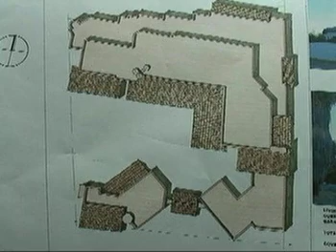As you can see from this particular roof plan, there's the main residence, a garage, and then a detached guest house attached by a breezeway. During staff's review, this residence does comply with all zoning codes and regulations. The pad elevation of the house is about 466 feet.

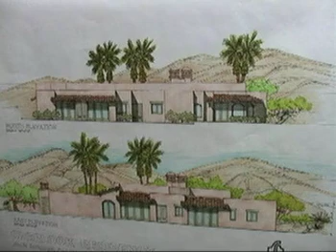Neighboring pad elevations—you saw a case at the previous commission meeting for the house behind it. That house has a pad elevation of about 474, so it's about 8 feet lower than the property to the north. In terms of building height, you can see from the west elevation, staff chose to take building height from essentially finished grade because of the way the lot slopes up, instead of from top of curb or average curb.

At this particular level, the house is about 11.5 feet. At the second level, it's 15.5 feet. And at the top part, it's about 14.5 feet from finished grade.

An AMM was approved for a 5-foot reduction in the front setback. The engineering department had required an additional 5-foot dedication on Overlook Road, so they were credited for that in terms of their front setback. The applicant is here, as well as the architect, and is available for your questions, and so is staff.

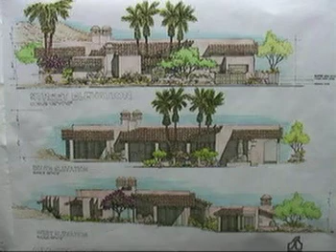Are there any questions of staff? Gene, perhaps you can comment on the 3 suggested additional conditions that are part of our motions agenda.

This item did go to design review on July the 22nd. Design review reacted very favorably to the project and really just had 3 pretty minor suggestions regarding the circular driveway at the southwest portion of the property. They wanted to see a reduction of the hardscape there, so they asked for that particular driveway area to be narrowed.

The second suggestion was to pull the existing adobe block wall on the south property line to extend it from the east to the west property line. And the third recommendation was to expand the plant palette to include hillside desert landscaping.

Was the applicant receptive to those suggestions? Yes, he was. Is the applicant here, and if so, would you like to address us?

My name is Wendell Veith. I'm the architect, along with Sosa Lance Design, for this project. We concur with the recommendations of staff. We have submitted a revised site plan, not up on the board at this point, that shows the location of the existing wall being extended and some gates put in on the driveway, and also the narrowing of the driveway. So we concur with that part of it, and we would ask that you approve it as the design is set there.

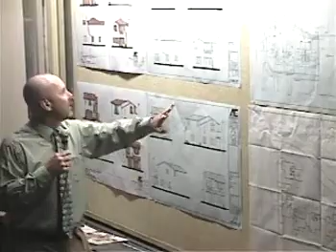Plan number 1, the original approval had a different window program here. Design Review requested that these windows match and that these windows match, creating a form of symmetry. The Design Review Committee also recommended that the spacing and the distance match.

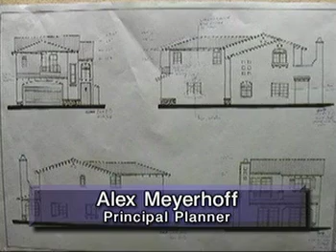The applicant is aware of the recommendation in terms of this unit. The applicant is able to create the symmetry with the windows in terms of the window type, but not in terms of the spacing, simply because of what's happening on the inside of these windows - this is a bathroom. So this window can be replicated here. These match in terms of the window type, but the spacing, the applicant would prefer not to change, simply because of the function inside of the units.

On plan number 2, the requested revisions are a little more extensive. Design review has requested that the wall be pulled out a little further here, as in the original approval, and have a recessed balcony. So the wall would pull out, and the roof line would also be extended, resulting in the elimination of the tile accent, another of the Design Review Committee's objectives. The applicant will discuss that in greater detail in terms of the difficulty to achieve that objective.

On to elevation number 3 and 4.

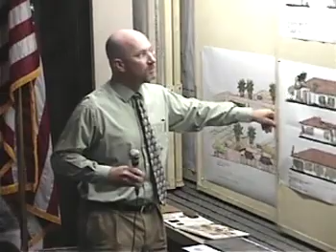Plan 3 was identical to the earlier approval and was approved by Design Review. Plan 4 had some changes to the windows and fenestration on the back, or south, frontage. This side will have a 6-foot wall along Alejo.

However, the Design Review Committee was comfortable with these window changes, creating a slider here, but was not comfortable with these and requested that the applicant go back to the earlier split window pattern. I know the applicant is here and would like to discuss this.

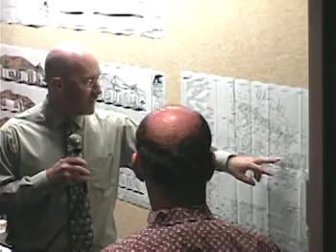In terms of the relative pad heights, the existing single-family residence to the east is 477.4. The immediate unit directly to the west is 0.9 feet higher, and has a relationship to the street here of a finished floor elevation of 478 and a street height of 477.

Engineering typically likes 1.5 feet above the street, but because this is an existing context with buildings essentially all the way around it, with the exception of the south side, we've tried to keep the pad heights as low as possible. It's not too objectionable to have this relationship because there's less than a foot difference in the heights.

We're recommending approval of the final grading plan. However, we do not have the wall information. We're going to bring the wall plan back to you, and the final landscape plans back to you, when those items are ready.

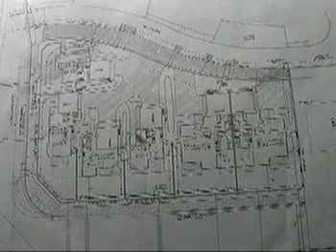I wanted to call your attention to a perspective drawing that helps demonstrate the applicant's desires in terms of their final construction documents. With that, I'll be happy to answer any questions you may have, and the applicant is also present.

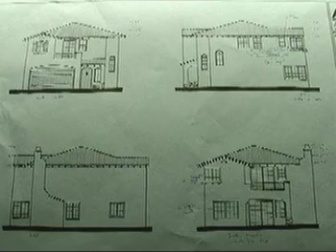I'm Alan Sanborn, architect for the project. Would you like me to go up there and address each item individually? If you can do it from the podium, that'd be great. If you feel it's necessary to go up, we could use the remote mic. Yeah, probably would be better. Okay, why don't you go ahead and do that, Alan?

I believe with regards to Plan 4, Design Review had a preference to change the dining room window from a single window back to a double window. The double window was extremely large, and the original room was a little bit larger. The single window fits in the dining room better. It's operable, and it allows furnishing on either side of the window. This is in the backyard behind a 6-foot wall, and we feel it's not that big a deal. We'd prefer the single window in the dining room, and it also frees up the clutter along the back of the elevation where we have a number of windows going on.

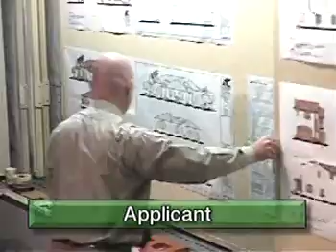On the side elevation of Plan 1, the request was to make the toilet room window larger and realign it so there's equal, symmetrical spacing. I feel the vernacular of this architecture doesn't require symmetrical spacing, especially on this elevation, which is 10 feet away from another building in an alley. We've detailed the corner window nicely. We will agree to make the window larger so that at least it's the same height, but I prefer to leave the window where it is. If you move the window, it ends up in front of the toilet instead of off to the side.

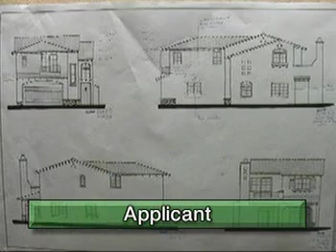And also, that was another reason why it was a little bit higher than the other windows, but must have been a slow day in design review that day. I don't know. Let's see. I think that was it on Plan 1.

Plan 2. What we had in Plan 2 originally was just a plant-on balcony. It wasn't really a real balcony. We decided in laying out the furniture that we rotated the inside of the room and wanted to put a real balcony on. That was item number 1.

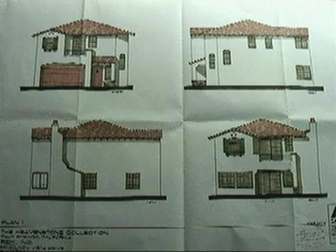Item 2, the garage had to get larger to accommodate an FAU we hadn't planned on putting in the garage. So what we did is we brought in the same detail that you find on the rear of the building with the balcony and the shed overhang. So it's not foreign to this particular unit. And it also provides us structural framing for the balcony.

The design review requested we build 2.5 feet of fake wall just so that we could enclose the balcony. I don't believe that's warranted. We'd prefer to use the same detailing that we've got on the rear of this particular unit.

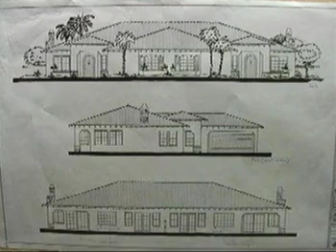They wanted me to take out the window in the garage. I prefer to leave the window in the garage. If I have one in my garage and I really like it. But we did decide that to take the same detailing that we have here in this location and add that to that window, dress it up a bit. This window is on the front entry walk as you walk in, so it will not make that wall quite as plain. So we feel that should stay in there.

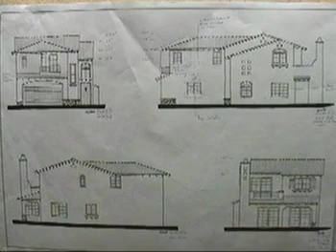1, 2, 3, 4. I believe that's the 5 items that they had in mind. If you want to take a look at how this balcony element looks, it's pretty prominent in the rendering. So you can see in a perspective how that's going to turn out. And that's it. Thank you.

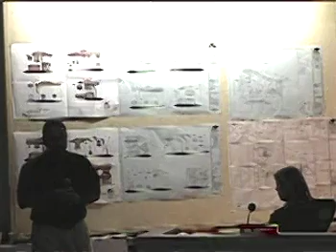Is anybody else who wishes to comment on this matter? Back to commission for comments or questions?

Yes. I'd just like to clarify one item. The final development plans before you are not a complete set of final development plans. It has to do with the buildings and the grading plan. We still have a landscape plan to bring back and some wall details and things of that nature. So those will come back. What we're trying to do is expedite the grading plan and the ability to start foundations and the like.

Can we assume, although it wasn't stated in the report, that engineering is comfortable with the grading plan as it is, even with the relatively minimum slope? It's been approved by the city engineer.

Yeah, thank you. Was anybody at the commission at design review? I was not, no. Were you there, Doug, or you out of town? Let me shed some light on, I find Mr. Sanborn's arguments compelling. And what am I missing?

The design review was looking at the building in terms of primarily the external orientation of the windows, fenestration. We did flip back through the floor plan so that they could see what was happening on the other sides. Projects change shape from when you look at them just conceptually to when you're designing construction documents for the program of construction. So these are changes that the design team has felt are an improvement to the project, and the design review committee was less comfortable with some of them and more comfortable with others.

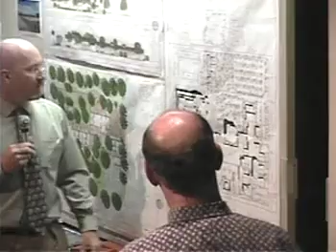This is the Desert Regional Medical Center Campus Master Plan. Indian, Tachevah, Via Miraleste, Mel Avenue, and this is the extension of Paseo El Mirador, which is a private street. You can see multifamily, single-family office, and office.

In terms of the hospital site itself, the proposed location of the Hanson House is right here. Recently, you looked at a land use permit for a parking lot in this location, a lot here, and there is the existing tower here.

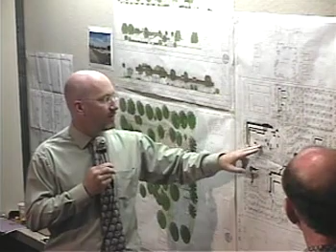In terms of the site itself, Paseo El Mirador, we have some apartment complex here, some covered parking. The site takes entry here, although there is a private driveway here, and 2 RV spaces right here for the family members to bring their units so that they can stay on site and have those units available for larger extended families.

In terms of the buildings, there is a main building, lobby, administration, living room area, dining room, kitchen complex, pantry, janitor's uses right here. There's a meditation building here with a conference room and another janitor's building, closet.

A storage building here adjacent to the parking lot. You'd come through entering the main trellis area right here through the main building, through the colonnade here. There's a passageway here, and the guest rooms and caretakers' living areas in the back here. Again, there's 7 bedrooms, essentially one room efficiencies with restrooms, and then there's a caretaker's unit here, an 8th.

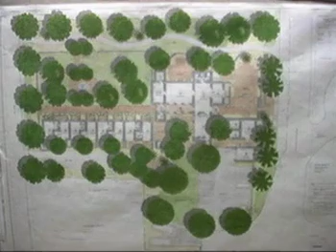In terms of the hardscape and courtyard areas, the entry area has a nice entry courtyard here with the fountain, the trellis covering towards the main entry. There's also a small courtyard here, and courtyard here and a larger rear yard. There is a block wall surrounding the project and wraps this way. There's also a pedestrian connection between Mel Avenue and the main hospital area.

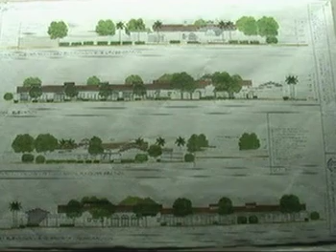In terms of the architecture, they're using 2-coat plaster with smooth finish, 2-piece mission tile with a Madeira blend, heavy timbers, Milgard wood-clad windows, and a number of other materials in the same kind of vein. What I'd like to do is answer any questions you may have at this time and invite the architectural team up to answer any questions you may have.

Any questions of staff? Mr. Matthews? No, I don't. I'm turning off my mic. Mr. Grinch? I'm going to have to abstain.

I have a question, Alex. On the drawing to the right, there appears to be 2 other buildings that have been labeled not included. Thank you for pointing these out. My understanding is that this master plan with this building is an earlier rendition, but I would ask the applicant

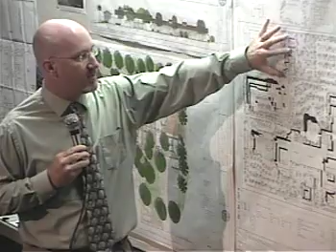to clarify that. You're correct in your question that these are not included in this current phase. It was never mentioned in terms of an additional or future phase. I think it's just an earlier rendition of the building. Mr. Chairman, I believe in the future there is an opportunity in an area for expansion, and if that were to occur, they'd have to come back for final development plan for the commission.

And if that's incorrect, the applicant will clarify that. Very good. Okay, this is a public hearing item. Anybody wishing to address the commission may come forward at this time. Please give us your name and sign the clipboard before you leave.

Go right ahead. My name is Ana Escalante, and I'm one of the architects on the project. To answer the question about Phase 2, at this point it's not going to happen due to several project reasons. So we're only pursuing Phase 1 at the present time, just what you see on the boards, not including the other small buildings represented on that master plan. So for the record, we're just seeking permission for Phase 1, and Phase 2 probably is not going to happen.

And if you have any questions, by all means, feel free. You may have some at the close of the public hearing. Is there anybody else that'd like to speak on this matter? Seeing none, we'll close the public hearing.

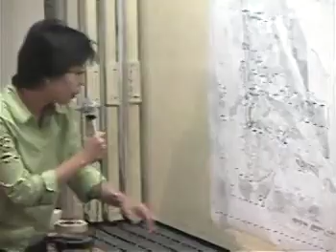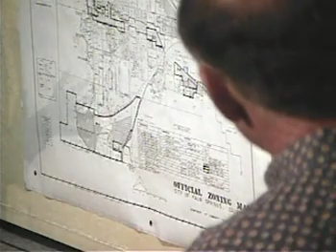This is an application by Ian Danielski for a new single-family residence at 3130 Barona Road. This property is located— actually, let me plot a map and clarify. This case is in the specific plan area. If you follow Bogert Trail past the wash, it's immediately past the bridge on the north side of the street, so it's a very short part of Barona Road.

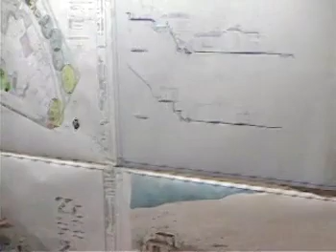The plan he's presented is a house that has been to Development Committee review several times. It did go to design review. Staff had concerns about the buildings built over the wash. As you can see, this is the drainage channel wall, and they have a guest house, a pool, water feature, and an office area there.

In discussions at design review this week on Monday, we discovered the slopes here are far too steep to build on per the zoning ordinance, which states any slope greater than 30% shall be kept as open land. That negates the hillside proposal as shown. Design review recommended, with a 4-0 vote, that nothing be built essentially past that drainage channel wall. Instead, as compensation for losing that part of the hillside property, they recommended moving the guest house and office and adding them to the main residence as a second story. Apparently there was precedent for this previously at a house on Avenida Sevilla. That was one recommendation from design review.

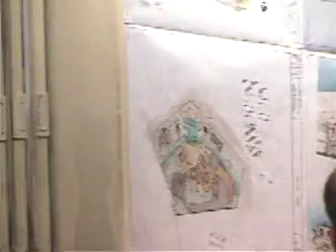Secondly, looking at the plant palette, there was discussion about landscaping the hillside. They didn't seem to have a problem with it as long as it was desert native landscaping. For the water feature, there were suggestions it be moved in front of the wall instead, maybe built as a fake mountain waterfall feature at the back, rather than crossing over the drainage channel. The applicant and architect are here with a model of their plans, and staff is available for questions.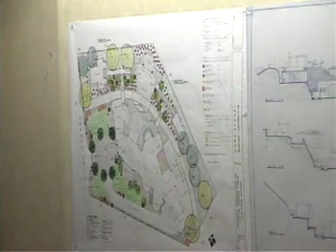Design review responded well to the house; they liked the materials. Originally, when the applicant brought in the material board, staff recommended the concrete tile be replaced with something of higher quality. The applicant subsequently brought in a newer concrete tile and also slate. Design review didn't really like that slate roof; they preferred to see more of an earth-tone tile. So they really liked the original tile instead, even though it's concrete, not slate. Slate's kind of earth tone.

Thank you, Jing. Doug, you wanted to make a comment as well? Yes, Mr. Chairman, the applicant has gone to great extent to try and utilize the entire property, including the hillside portion. When I was made aware of this in one of our early development committee meetings, I learned that when this subdivision was originally designed, it was very controversial at the city council level. One issue debated was whether the lot line should follow the channel or run up the hillside.

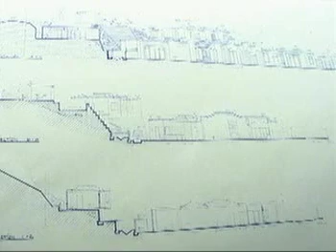If you approve crossing over that drainage barrier, we'll have a succeeding concern from adjoining property owners about who's higher, and whose privacy is protected and not protected. It was really the intent of this subdivision that they be flatland houses, single story, and that they fit on the properties and not go up onto the hillside.

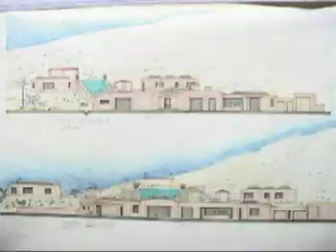In addition to encroaching into that hillside area, there are portions of the proposed house that, as initially proposed and even as redesigned, will have a significant visual effect on a prominent knoll on and adjacent to this property. It's a trailhead for hiking trails, and if that building were built, you'd have a significant outcry from people who hike in the area saying we didn't manage our hillsides and open space very well.

On the issue of steepness of slope, the 30% rule, I didn't calculate the actual slope of the property. I was more concerned about what the intent of the original approval was.

Down to the east, to the south of this, there was a two-story house approved. It was right up against the hillside. In the two-story area it did not have any neighbors, and it kind of fit back into a corner of the subdivision. That was looked at very carefully as to how it might affect adjoining properties.

Mr. Chairman, that completes our report.

Thank you, Doug. What we have before us is this application showing the building across the channel. We don't have any interim response yet from architectural review. No, the design review meeting was Monday, so the applicant hasn't had a chance to respond. The applicant did do some revisions to try to lower the guest house furthest to the left on the site drawing, but it still causes concerns at staff level, and if it were built, you would hear from lots of people about it.

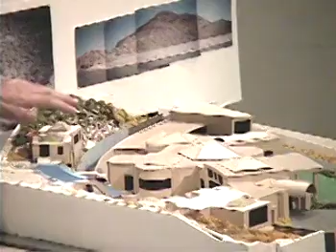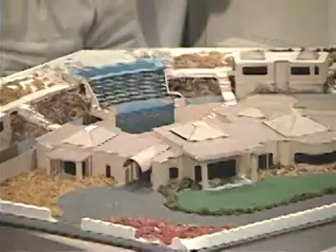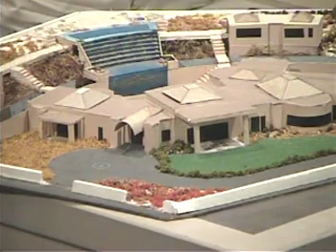In any event, at the Architectural Control Committee meeting, we felt there was an undercurrent that perhaps, if we did it in a good way, we could have some water coming off the hillside. There were some adamant voices that suggested otherwise. However, I walked the trail this morning and went up on top of this and looked down on this particular lot.

I also followed the trail all the way around. You have to go back quite a ways; it starts going back towards the north and east. Then if you circle back around, there are 2 houses to the south of this project that you can overlook. You look back into the pool area, and there's nothing that really prevents you from looking into their backyard. It's going to be the same here.

But if you did the element right, in terms of the water feature, bringing in natural rock and boulders, from what I gathered viewing it from the trail, there's no way you could really see where the water's coming from. It's going to be a really nice visual element for the property owner, incorporating natural landscaping and water coming down in a waterfall effect into the pool, spa, or anything in their backyard.

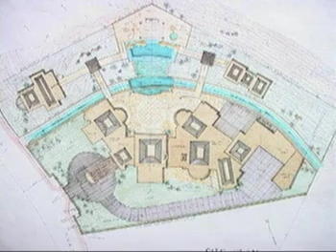I can see where you don't want to ruffle anybody's feathers, and you don't want to set a precedent where everybody starts creeping up the hill. But we're not talking about building improvements, just a natural-looking flow. If you go to the west over by the oasis, there's water flowing everywhere on the west portion of the canyon. People pay good money to walk back up there and take a look, actually.

So that's one element we would like to incorporate into the plan. Not anything that looks man-made, as this appears, which might throw you off, but more of a natural look. We would like to do some landscape treatment along here, nothing ornate, keeping it a natural type landscape.

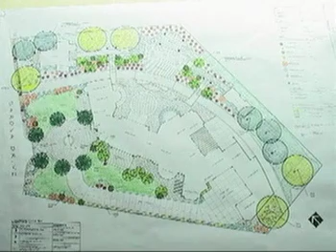They also mentioned, I don't know if you mentioned it earlier, I couldn't hear you, but they said we could do some low-profile lighting. We're not talking about spotlights up on trees or anything like that, but certainly, if we had the water feature, it would be a nice element to add to that.